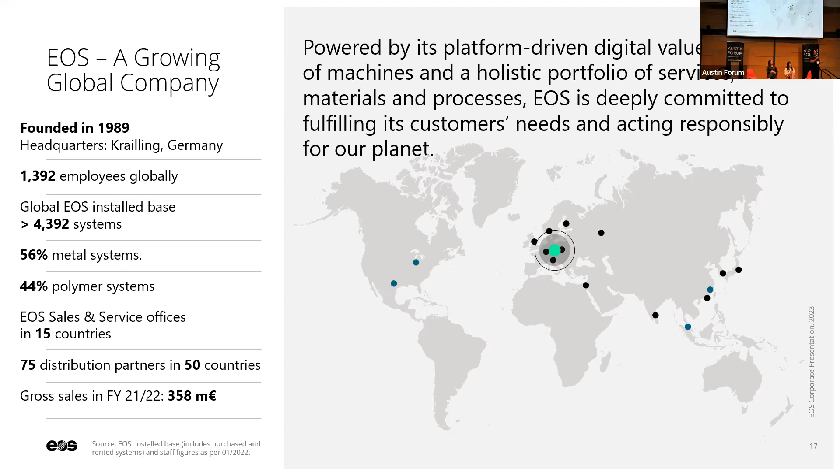So additive manufacturing, for those of you that are new to the industry and curious about this technology, offers a number of different opportunities versus traditional manufacturing such as CNC milling, injection molding, and so on. There's the freedom of design — you have the capability of modeling something with complex geometry that couldn't previously be made with traditional methods.

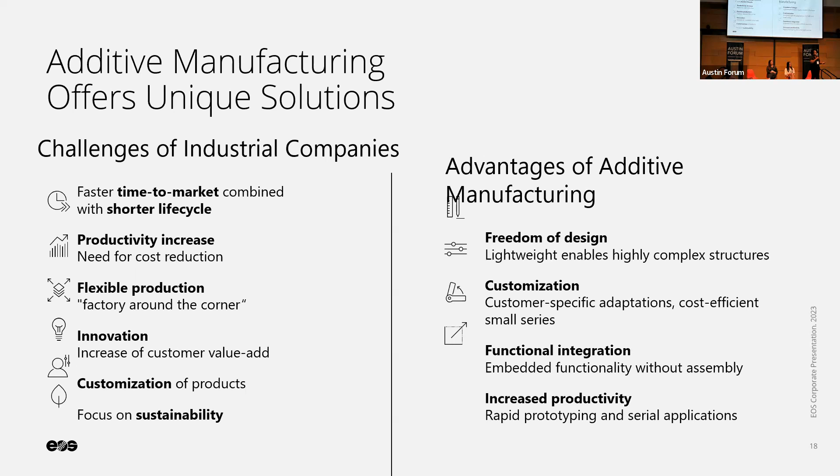You have mass customization — with that 3D model comes new opportunities for customization and tailor-fit applications. There's functional integration, where you can increase the functionality of a part without complex multi-part assemblies, and increase productivity. You can go quickly through iterations of rapid prototyping through your production and development process, all the way up to manufacturing of end-use parts with 3D printing.

I work for Additive Minds within EOS, which has three different components: consulting, applied engineering, and training and education. All of these are important to the production and scale of 3D printed solutions. A lot of these components require hand-holding with a customer if they might be new to 3D printing or the specific technology that we provide.

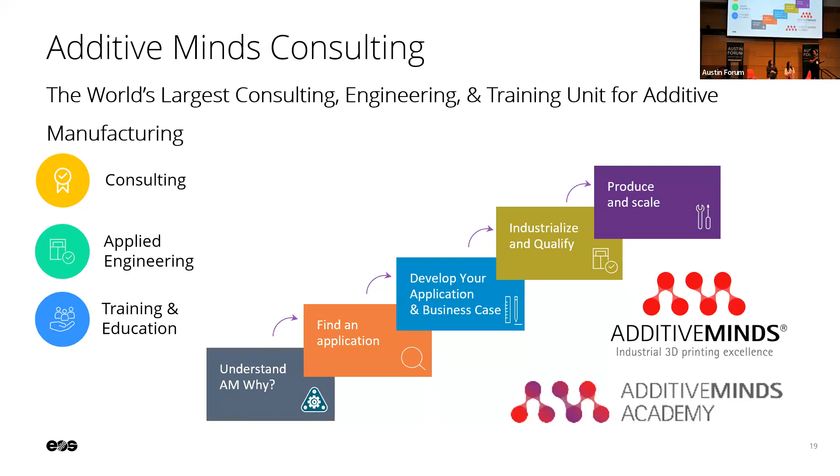Additive Minds Academy does a lot of heavy lifting with education, being able to ensure that customers understand what the technology is about, what it can do, and how it can bring value to their use cases.

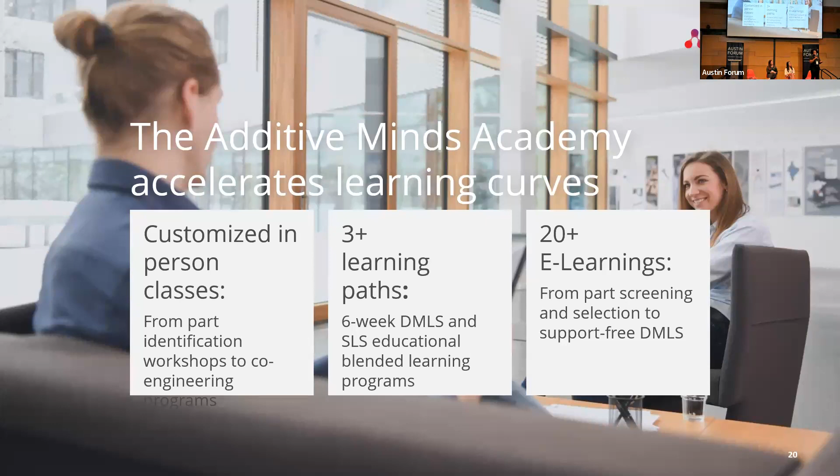The general structure of our 3D printing technologies at EOS all focus around laser sintering, either of metal powder or plastic polymer powders. You create a 3D digital model, use software to slice the model into various profiles, and then those profiles are 3D printed layer upon layer, kind of like stacking a cake, to develop a final 3D printed part in your desired material.

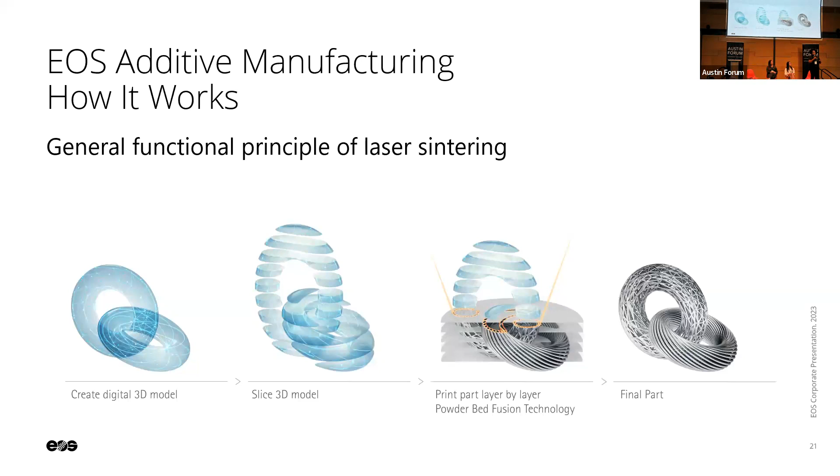After that, you have a final part, which you could post-process in a number of different ways. So you can go from idea to product with different manufacturing technologies: design and engineering, production, post-processing, and the final product. EOS produces all of these machines, from the Formiga and EOS-P systems to the EOS-M technologies.

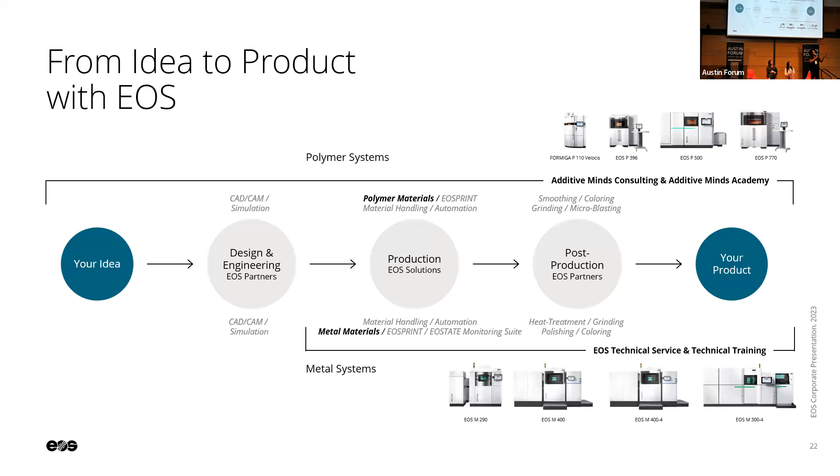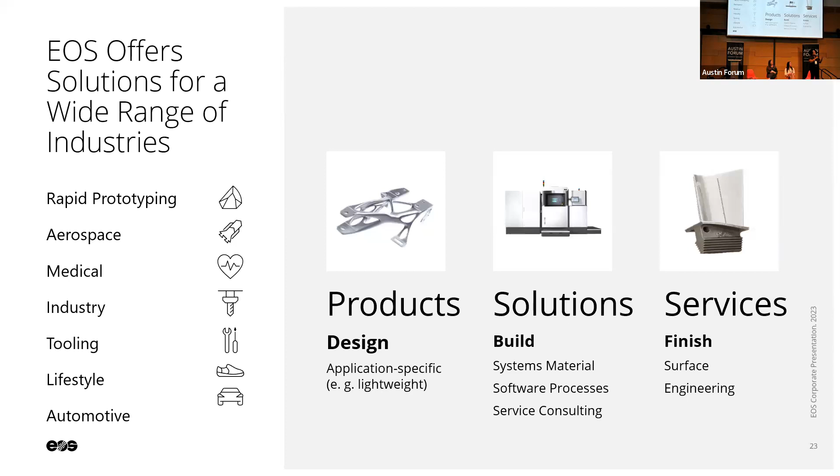At EOS, since I work specifically on the metals team, we focus a lot on aerospace and transportation applications, where metals are really valuable. But we also dabble in medical, industrial applications, tooling, lifestyle and consumer goods, and automotive applications.

So a couple of quick examples. For example, the Airbus A350 extra-wide aerospace plane. This was a really great venture in that they were able to take a 3D printed assembly and narrow down a 10-part assembly to one complex part that reduced the weight of the aircraft.

It costs 25% less to produce, and it requires 16 latch shafts. It also was able to reduce CO2 production due to the lightweight functionality of the parts. You're using less fuel during transportation, which leads to a more sustainable transportation process, and the fuel cost reduction equates to significant savings per plane.

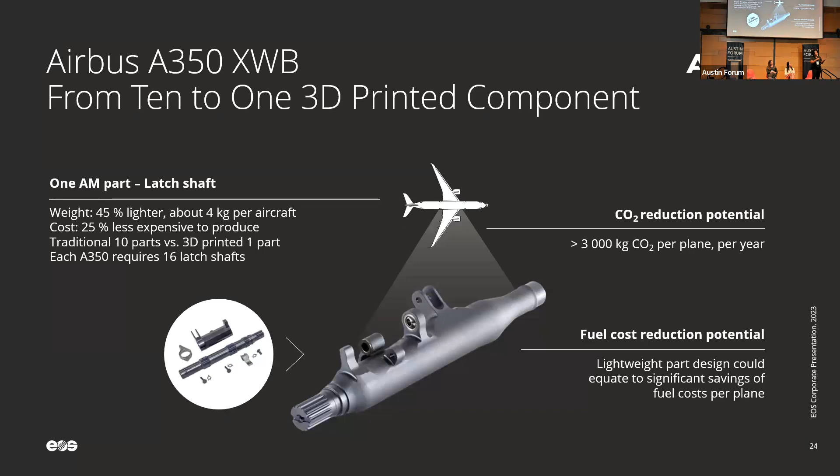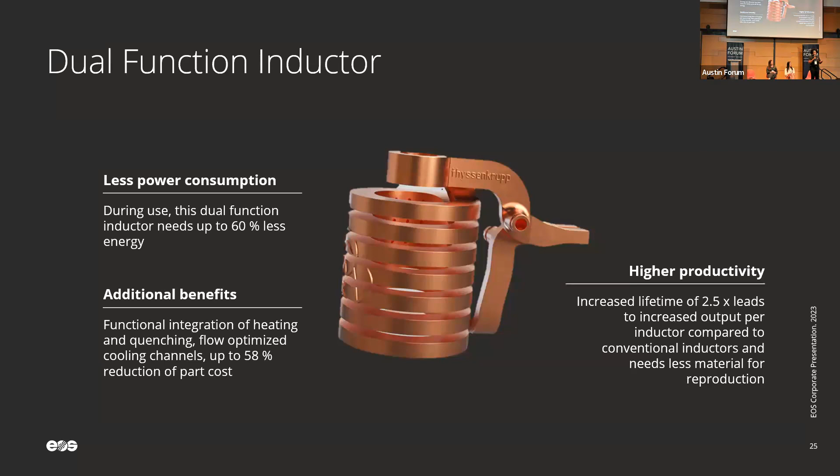Any one of us can get 3D scanned, and that data can be translated into 3D point clouds. That information on the computer can then be translated to create a model tailor-made to your geometry and personal anatomy.

And then with that, you can create custom, comfortable items, not just for the face, but that could also be applied to clothing, footwear, any type of wearable as well.

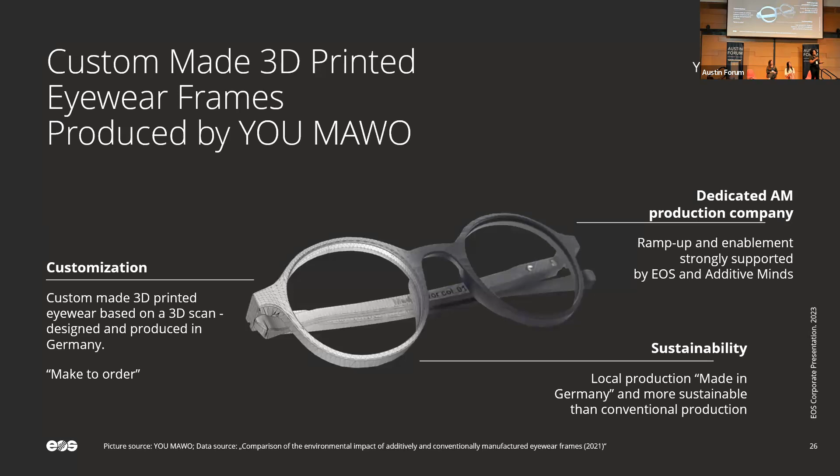It could be machined, but the turnaround time for that production might be astronomical and may not be effective for a fast manufacturing process, versus you could 3D print it in-house or through a service provider at a fraction of the cost and faster, with some additional benefits.

When I talk about multi-part assemblies, that's also a human factors consideration, because if you have someone on the assembly line assembling multiple parts, there's opportunities for introducing human error and mistakes. To reduce that, you can have simpler parts, simpler assemblies, and overall a safer device.

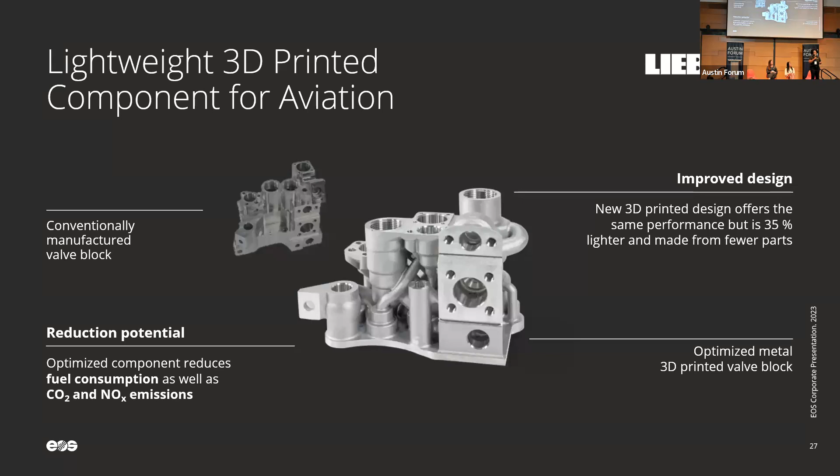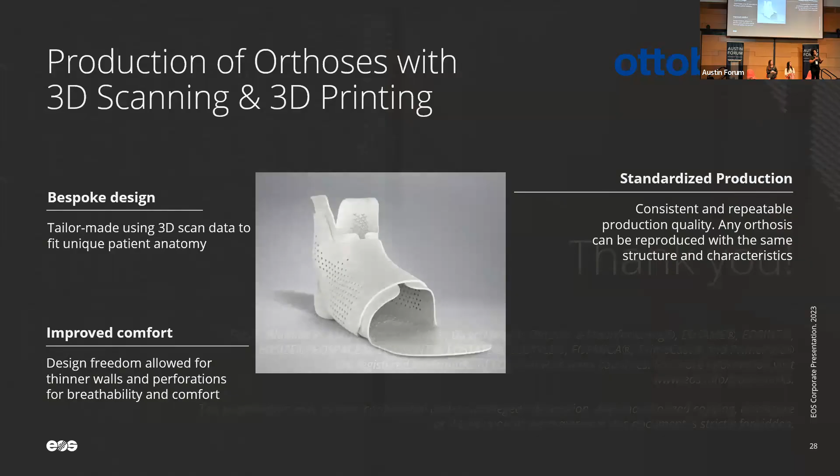I'm Samantha. Full disclosure, I am an Air Force reservist, but I'm here today with my civilian hat on as the co-founder and catalyst for Re3D. I'm here to share a little bit about the hype and the reality and the opportunity of 3D printing from plastic waste, by sharing our own plastic waste journey.

For context, we're a spinoff of Engineers Without Borders, NASA Johnson Space Center, and our time in Muganero, Rwanda, as well as in Nicaragua and parts of Mexico.

What we realized is the people we met were really brilliant. While we put a lot of effort into importing goods at cost and working with other NGOs and governments, bringing equipment and resources into countries, the people we met were quite capable. They were interested in inspiring their own vision, manufacturing their own goods, and taking control of their own communities, designs, and creativity.

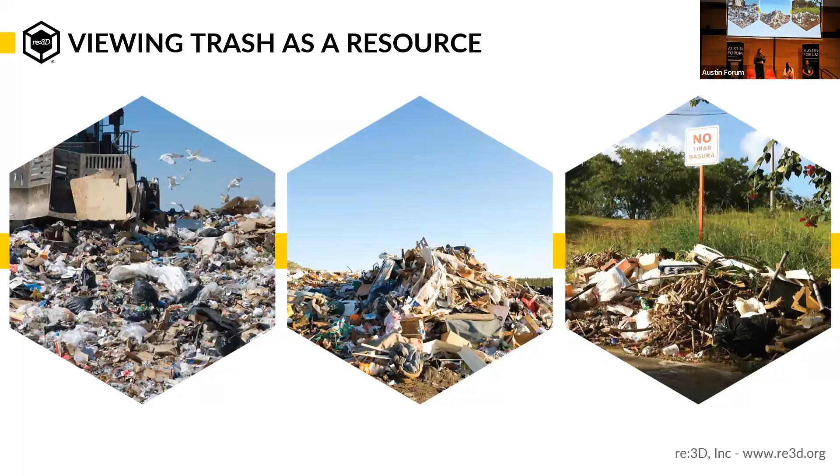The other thing we noticed, whether in our own backyard, in Puerto Rico outside our office, or in some of these countries and communities we were visiting, is that there's always a lot of plastic waste. Humans make garbage. And a lot of that plastic waste, as you may have heard, is not reclaimed.

So we saw opportunity to use local resources and local tools to build things locally. At the time, the open source 3D printing movement in 2009 to 2012 was heating up, and new types of 3D printers were emerging every day.

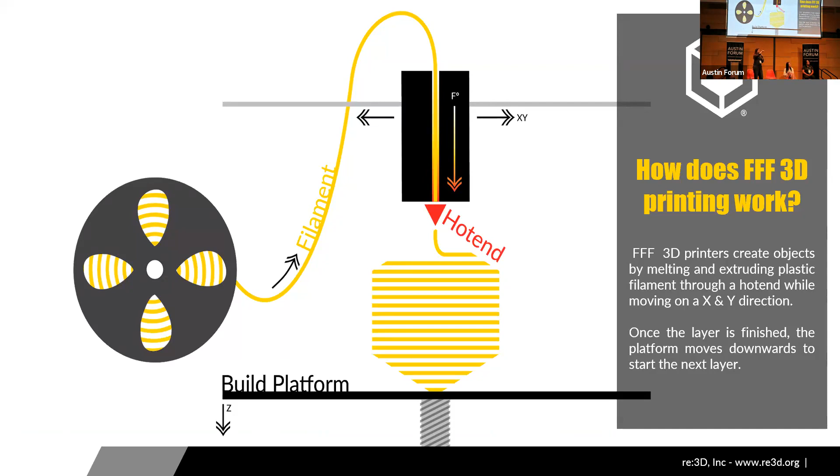So what made us different? When we started working in these communities and thinking about an open source platform anyone could use to fabricate their own goods from waste, we realized the desktop market at the time made much smaller printers. They were affordable, but you could only make an iPhone case. The people we met wanted to make prosthetic limbs, composting toilets, and tools.

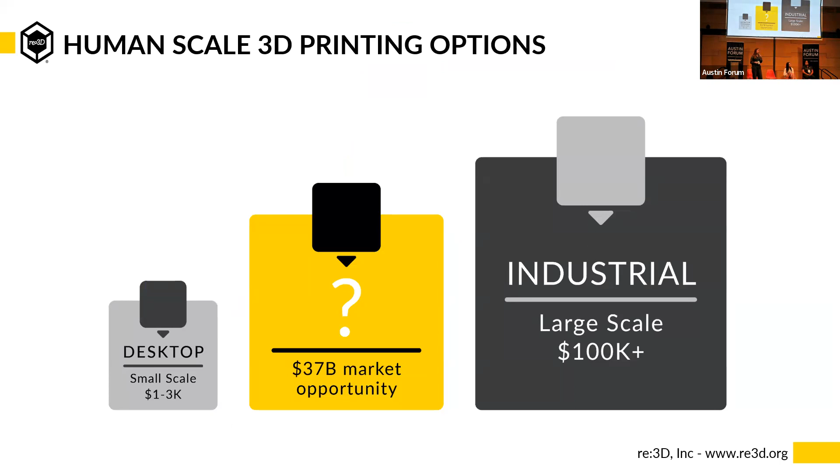Unfortunately, the industrial system can sometimes be cost prohibitive. It can be hard to source. Sometimes they're bigger, take a lot of power, and require more support. So we said, well, what if we could lightweight that?

To try and prove my point, I printed a green flushing toilet out of virgin material unsustainably, and proceeded to pitch this concept at bars. Some of you may have run into me around town.

Fortunately, there's a program called Startup Chile—you should check it out. They gave us $40K to try and make this a reality.

So this is Gigabot, a couple iterations after the first one. The first one's pretty ugly, actually. It's $10,000, and it was about 20 times the size of a desktop printer.

We were so blessed that Startup Chile had a booth at South by Southwest, launching 8 weeks after I arrived in Chile. They agreed that if we could make it, we could put it on Kickstarter. It was funded in one day, thanks to your support, and the rest is history.

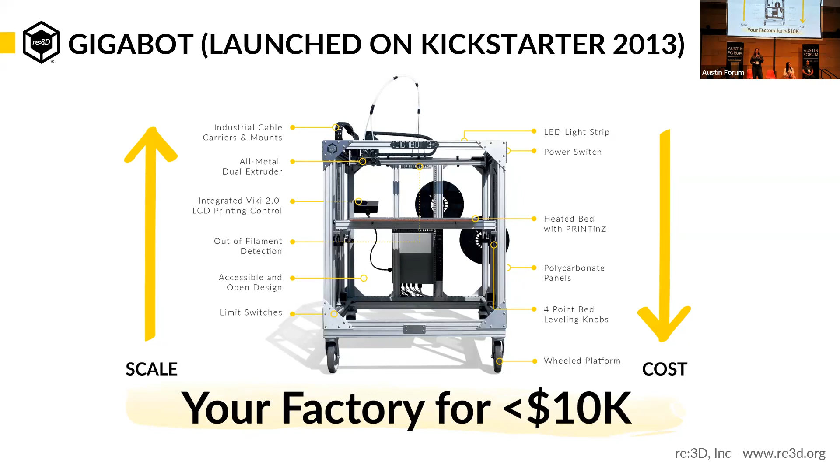What we learned from those Kickstarter backers, as a social enterprise and open source project with micro investors, is that people beyond Muganero, Rwanda saw opportunity in this. They were at MD Anderson Hospital. They worked for some of the biggest companies and academic institutions, and they really informed us on future development.

Then we started to learn more about functional opportunities, whether with prosthetics or other applications. I'd highlight too that we have a program called the GigaPrize, where we give one printer away for every 100 we deliver to someone trying to make a difference in their community. Those users are usually pretty invested in our hardware and gave us a lot of feedback.

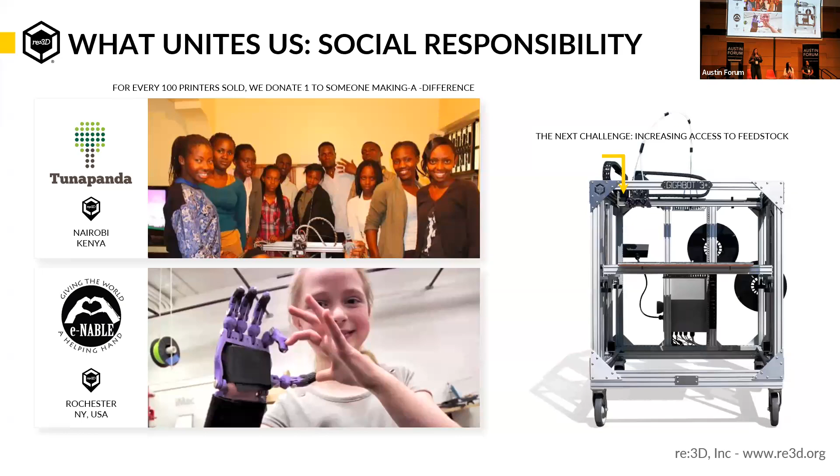They said, you know, it's so great that you made a printer that's big and affordable, that could take coiled filament and print with it. But you really need to double down on the opportunity to use local resources to feed it. So we started to look around the community.

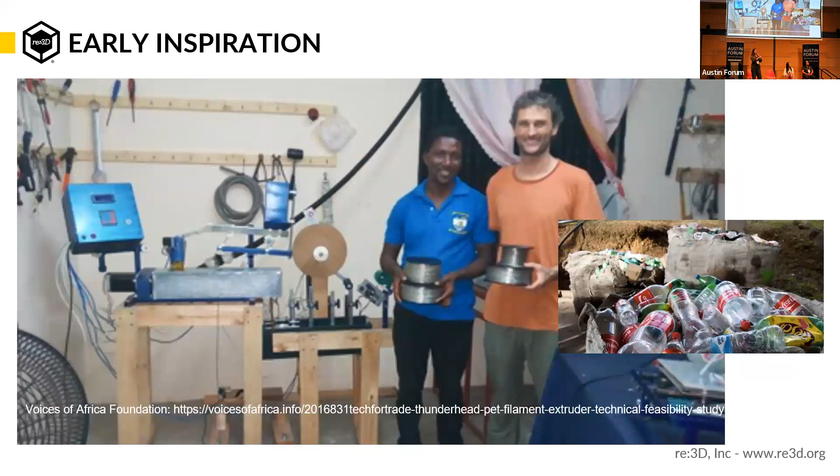We met Matt Rogi here, in Tanzania, who did a great job coming up with open source hardware to take plastic bottles in Tanzania to make local goods and create jobs. These guys called Quactus, in Chile, were doing a similar thing on a more industrial scale using lids from bottles. And by partnering and purchasing filament from organizations such as Fargo 3D, we were actually making filament from plastic landfill waste.

The downside, as we heard from our GigaPrize users and other community members, is that while that was so awesome, there's often a big plastic spool involved—sometimes cardboard now—and a lot of equipment goes into spooling that out. It adds an extra heat cycle, which can degrade the polymer, and you still have to source it from abroad. So people really wanted to know, especially if they're doing big things that need a lot of it, how to have consistency and potentially cut out the middleman.

So we were hugely inspired by an organization called WASP, you should check them out, in Italy, who at the time was using dirt and local resources to build houses. They were living in a utopia. They were embedding seeds in them to make natural rebar and finding ways to repair them over time.

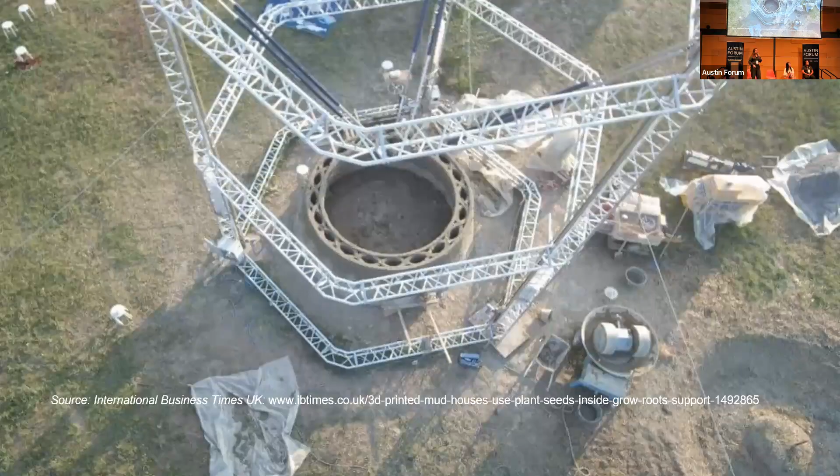And being NASA nerds, there was some gentleman at Clemson University that had figured out with the students how to engineer a yeast that would poop out the building blocks of plastic and what could be filament from astronaut urine.

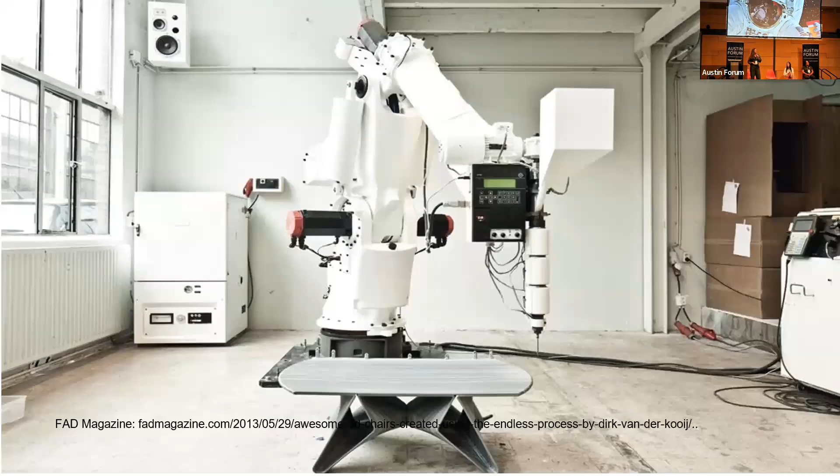And then there was Dirk van der Kooij, best soundtrack ever. He had a sponsorship, I believe, for the Dutch government, which has done amazing things in our industry. And he was able to take refrigerators, big forms of waste streams, grind it up, and make beautiful pieces of furniture that were retailing for thousands of dollars.

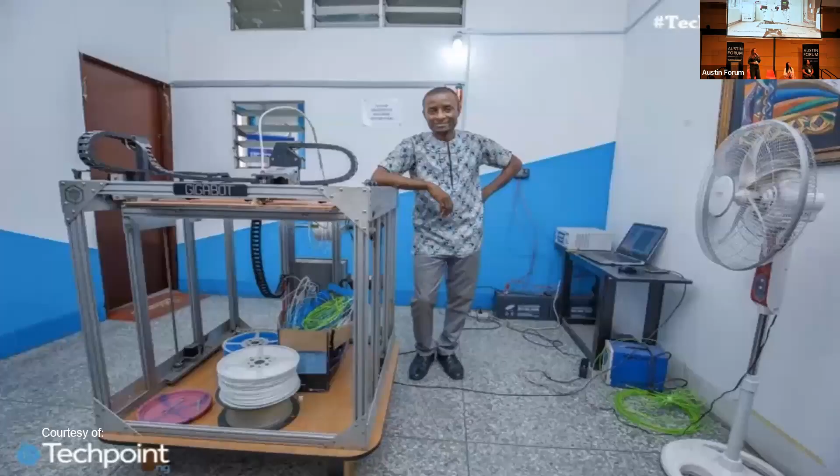And then there's our GigaPrize community. Seen here is Chokochu Clinton, one of our, I think, second or third winner in Nigeria. He couldn't wait for us to come up with a way to modify the printer to print from garbage, so he started doing it himself.

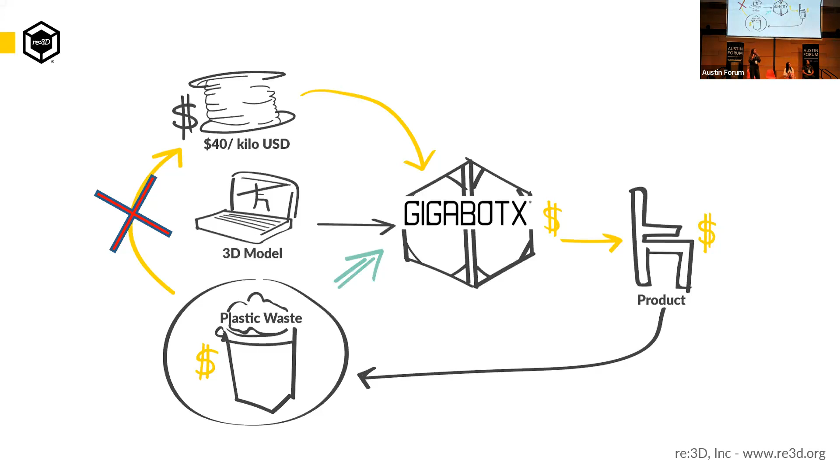So through the open source community and these pioneers, as we got together, we called ourselves Trash Printers United. We were an underground mafia. Re3D started to look at the opportunity to take shredded up plastic waste and to directly put it into the 3D printer.

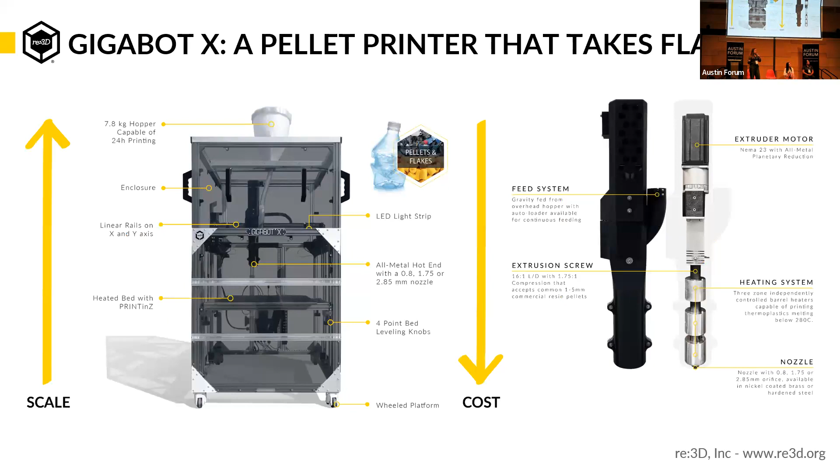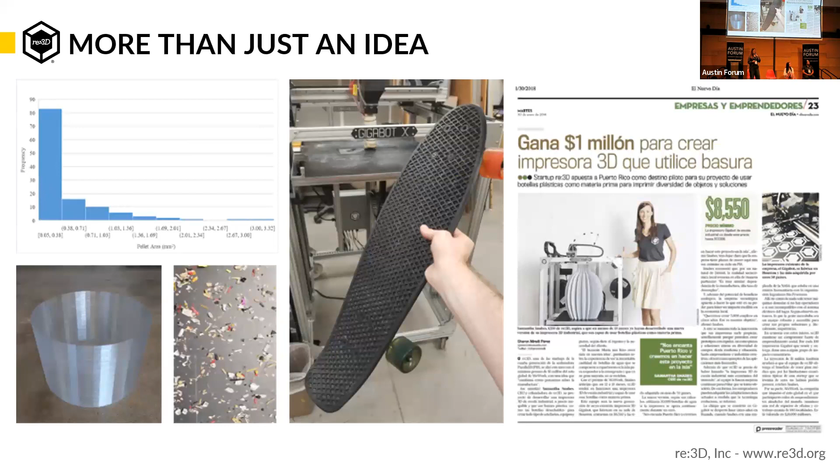You can grind up material and pour it in and print, in theory. In the early days, and what you may see online, are a lot of snowshoes, plastic oars, skateboards, because interns supported this project and that's what they wanted. And they also helped us appreciate that 3D printing from garbage is really stinking hard.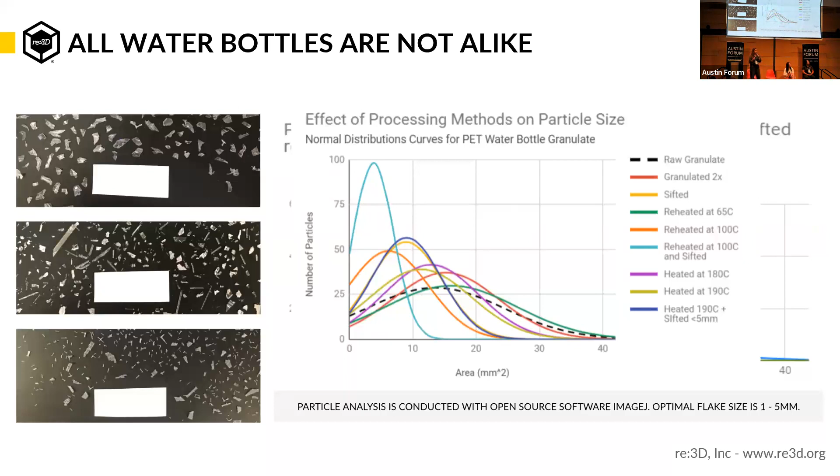Even if you're looking at water bottles alone, different vendors, different bottlers regionally will have a different thickness of the bottle. It may have a different colorant. It may curve differently, and the polymers may have been treated differently. So we have quickly learned what we don't know about material science, and we're hiring and partnering with a lot of leading institutions.

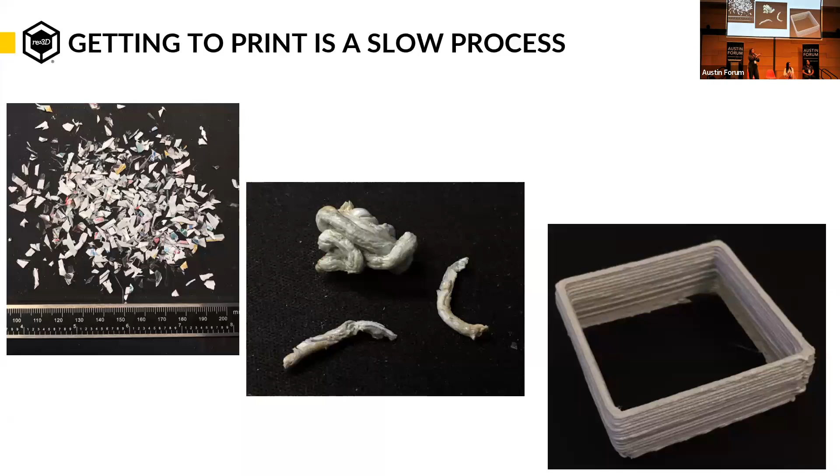So what do we do? Basically, we take garbage, we grind it up, and we try to make what's called a little poop. Just getting it to come out the other end is a big deal in our company. If we can get a little poop, then we try to make a square or maybe a cylinder. And if we're really lucky, we start to get to different geometries to see how we might modify the hardware via research grants or contracts to actually make something that could have potential.

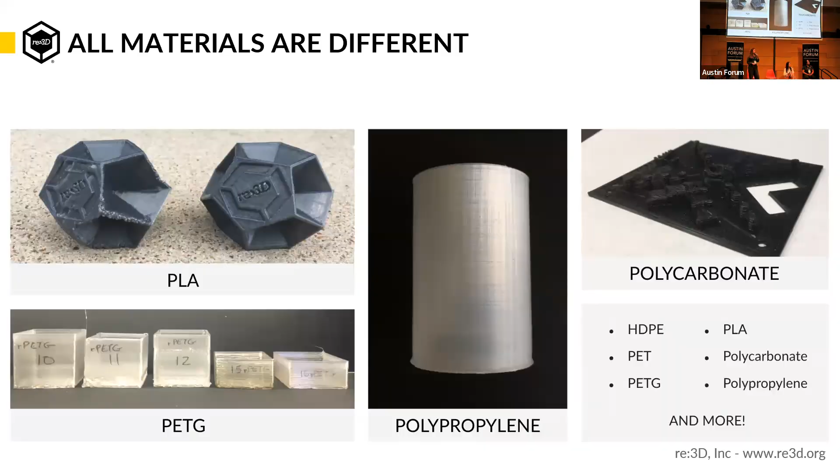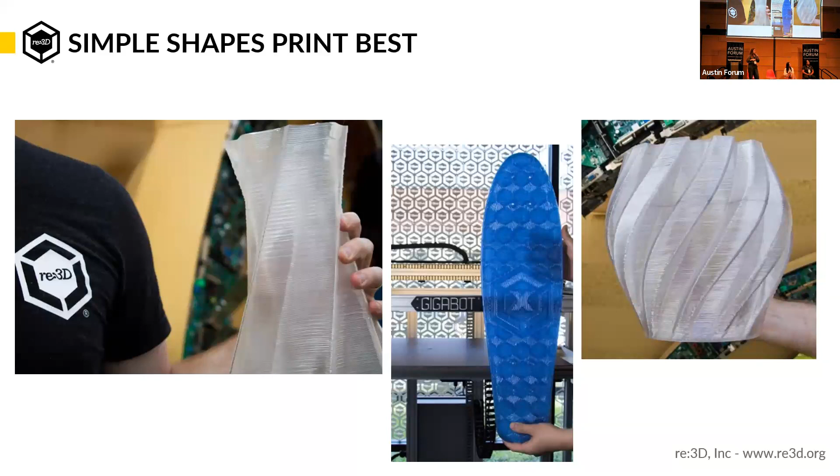So what can you print? Well, simple designs are best. As you'll see with Icon and ourselves, as we're looking at extrusion, line-like structures, continuous lines - those types of geometries tend to do really well.

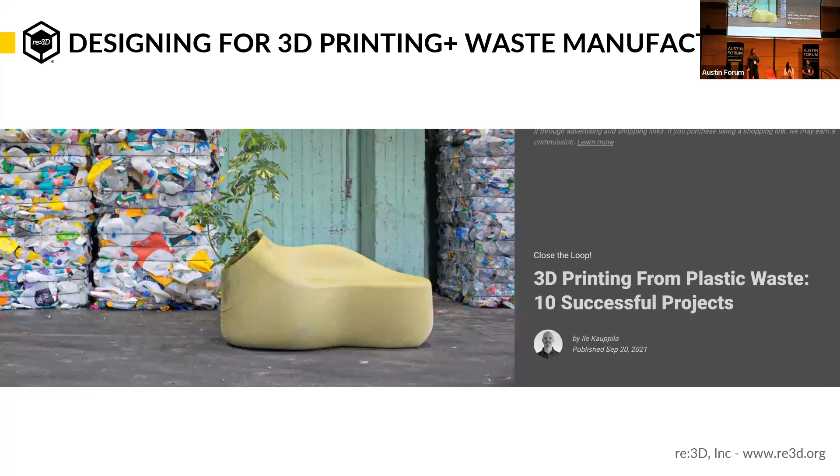And there's a number of peers in our community, again, that have done outdoor installations. Usually art begins some sort of home good that begets other opportunities via defense and aerospace - that's kind of the trend in our industry. But there are a number of successes out there.

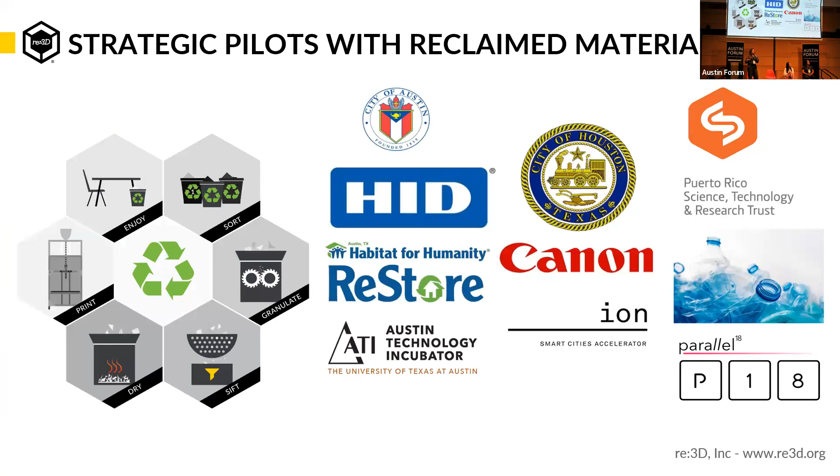So for re:3D as an OEM, what we decided to do is just double down on the three communities we're in - Puerto Rico and Houston, where our factory is, we'd love for you to take a tour, and here in Austin. We tend to partner with cities, a nonprofit, and some sort of integrator that can help us explore where this may fit. So for example, in Puerto Rico, that's taking water bottles that were left over from Irma and Maria and start to look at what we can make on the island.

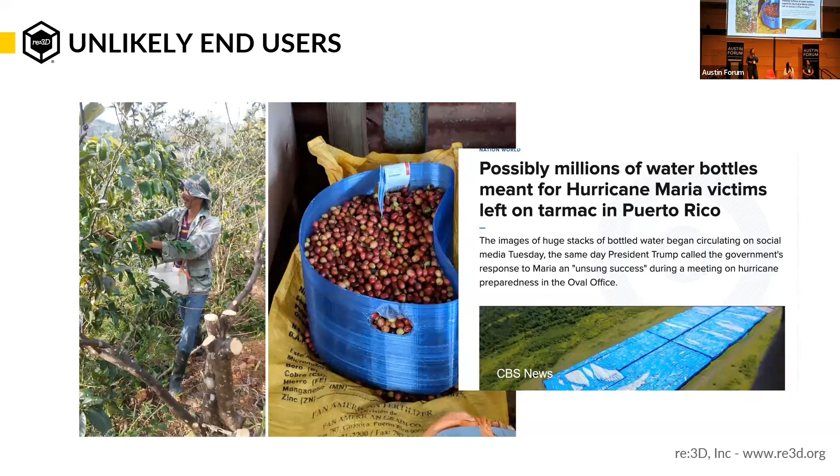It's looking at using plastic pellets to make coffee picking baskets for farmers. Again, a lot of the opportunity for us is big, dumb stuff or little non-sexy stuff. And the resolution may or may not be there as we start to explore what's out there. But we're inspired by Carbon and Adidas as they start to look at printing from waste with other types of printers and thinking about where's their real functional and scalable opportunity.

So for us, our focus since the pandemic - pre-pandemic and during the pandemic - has really also been doubling down on manufacturing waste.

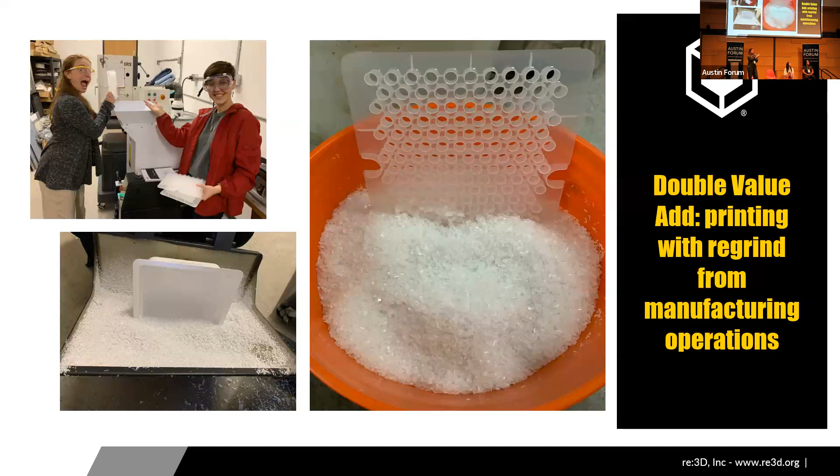It's clean, it's typed, it's consistent, and there's a ton of it. Seen here is waste that I unsustainably brought up from Puerto Rico from a major pharmaceutical manufacturer. They go through thousands of these a day. Just having downtime on their line costs millions of dollars. They spend thousands of dollars on fixtures. They're very interested in not paying to dispose of their waste off the island and using it to make something that they could need, or potentially for a tax incentive.

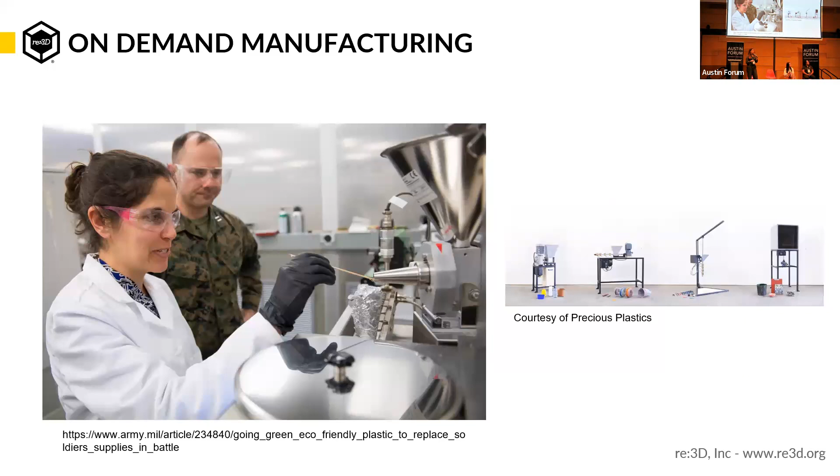The Army's also been in this conversation. Seen here's Nikki. Her and her team have been looking at all the hardware associated with printing from plastic waste on a base. And there's some other open source pioneers that we admire as well.

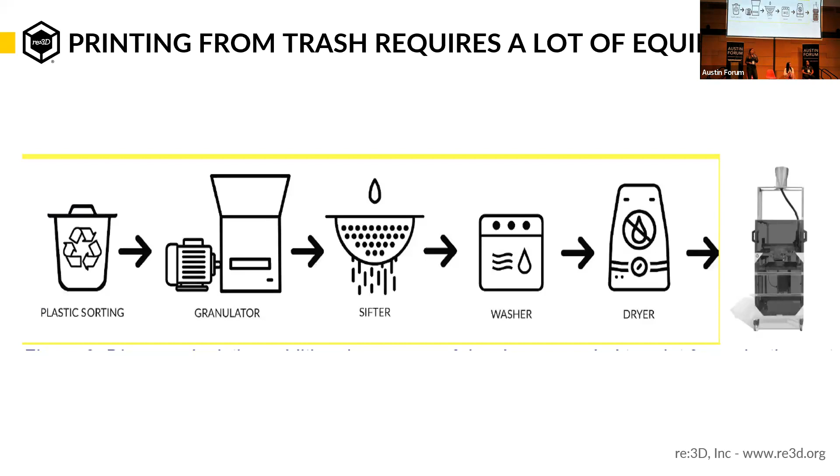But what all of us struggle with is there's a lot of other equipment that goes into printing from waste. You have to find a way to make your garbage smaller to go into the printer. You may have to sift it, wash it, store it, dry it, and then figure out how to print with it. And if you're going to print something big, you need a lot of it. So how is it going to feed? How is it going to be automated? How are you going to do that training?

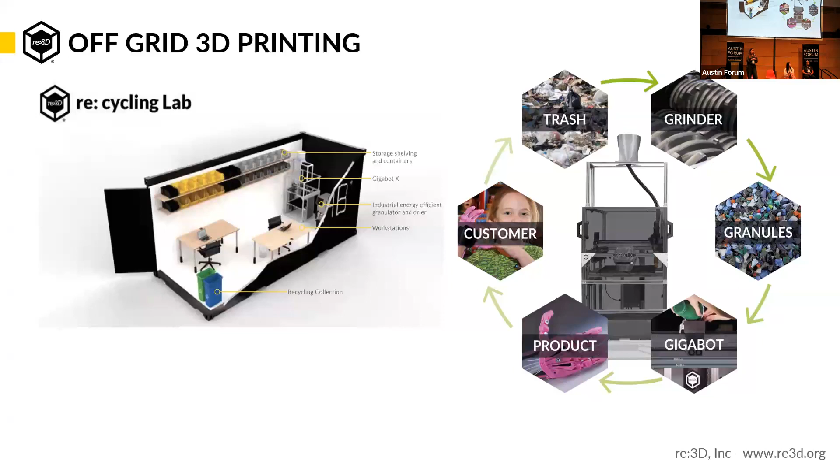So during the pandemic, Icon and a lot of other companies were really pressed by the Department of Defense to start to think about expeditionary solutions. So this is our version. We call it the Giga Lab. It may or may not have filament printers or pellet printers, but allows you to have all that hardware you need in a more mobile footprint.

We're honored now to have a contract with the Puerto Rican Science and Research Trust, the Air Force, the Army, and the National Science Foundation as we figure out where this makes sense and how big of a printer you could actually put into it.

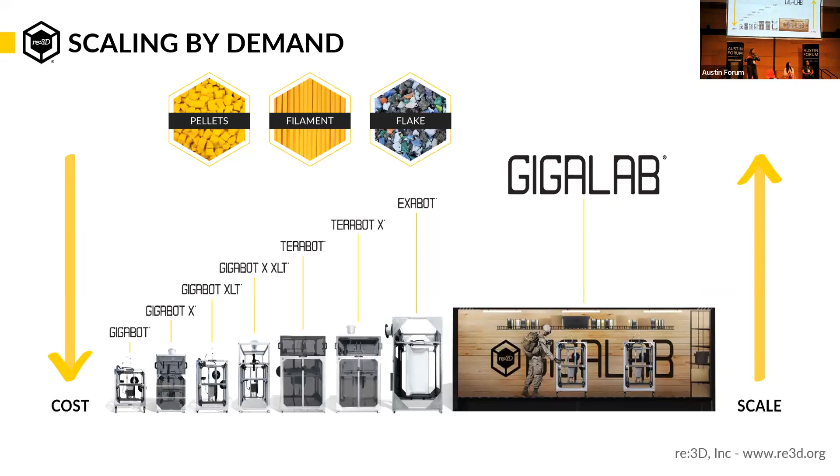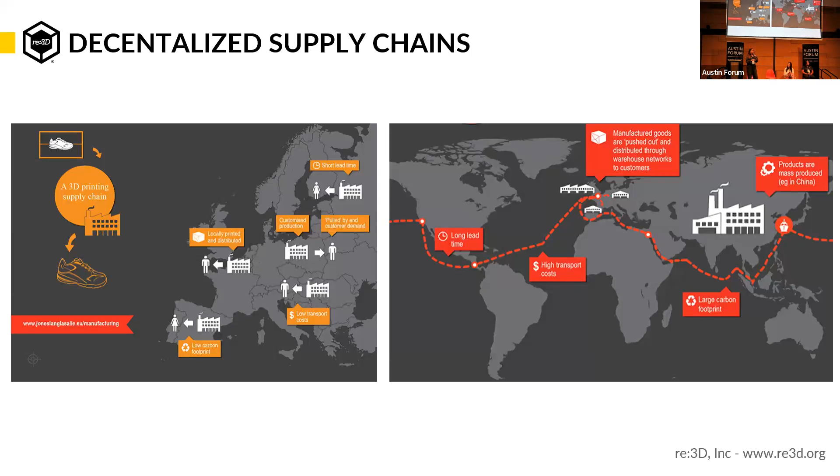So why do this? Well, one, there's an effort towards nearshoring right now for a number of reasons, primarily driven by sustainability. It also allows you to have this resource and move it around as needed. It's a form of project-based learning. So maybe you use waste in a municipality with one university, and then you move it over to another school when they're ready to transition that knowledge or the training to another location.

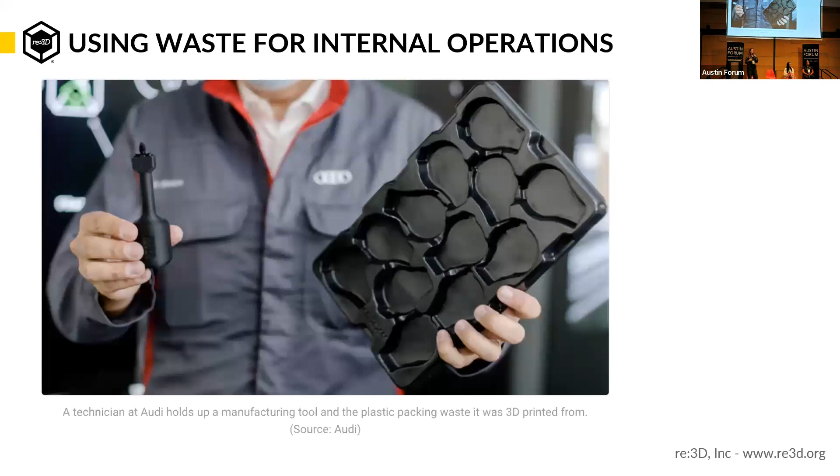We're not the only ones in this space. I do want you to take that away. There's groups such as Audi that have been looking at using their own manufacturing waste to make tools that are saving thousands to millions of dollars every day around the world. And we get so much inspiration from them. KLM is taking their own bottles to make filament with a company we really admire in the Netherlands that's then making tools that they need.

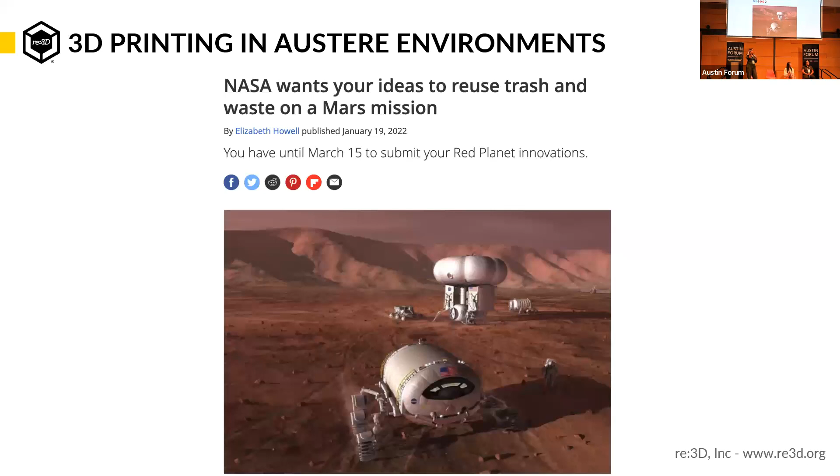And us, like ICON, like EOS, and so many of our peers are really excited about the future of space. NASA and other space agencies have doubled down on using natural resources and waste, which promises a really interesting conversation. We're also really fortunate to have 3 NASA awards now looking at printing from garbage going around the moon in the Gateway program.

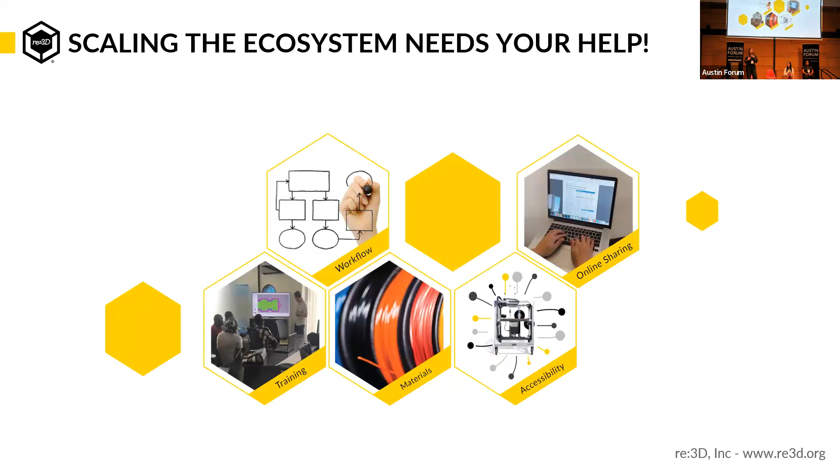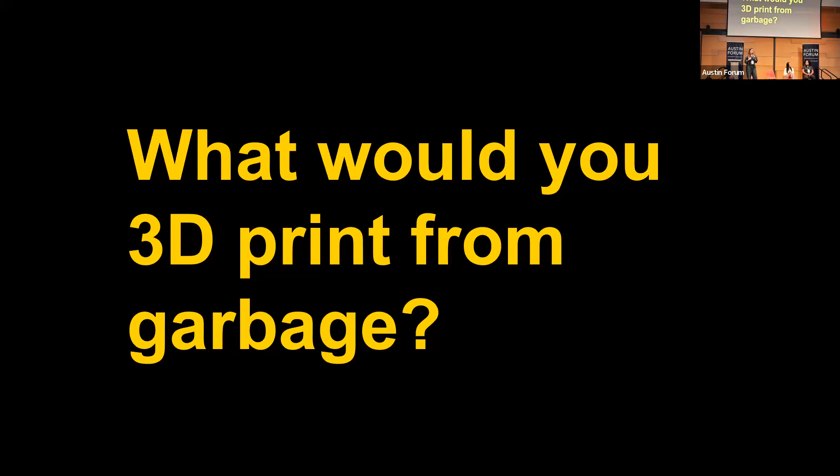So with that being said, what I do want to impress on you all is 3D printing from garbage, or what any of us are doing, requires a huge ecosystem. If you're excited about additive manufacturing, there's a home for you, whether it's in the training, the materials, the design, the product, the standards. The opportunities are endless. It's a very nascent industry in a lot of ways. So we really look forward to your feedback on what you would print from garbage, or what you would print in general, as we continue to explore sustainable and locally driven manufacturing together. Thank you.